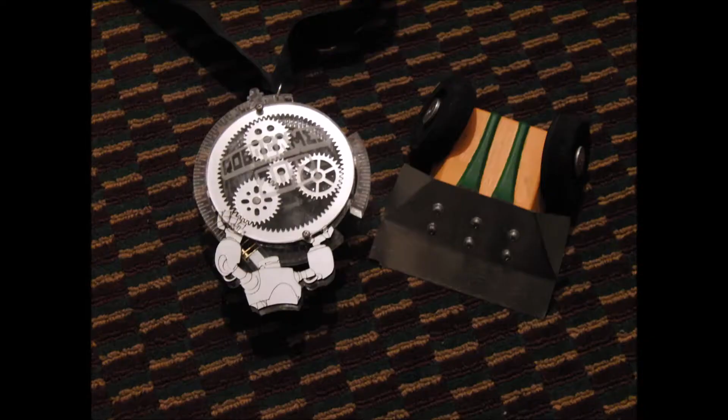This was the next version of Vendetta Junior, so I originally planned to have 4-wheel drive, to try to get some extra control, because that's what the guy who beat me at Robo Games had, so I was trying to copy him. But it was a bit of a disaster, and yeah, as you can see, I don't even look after it very well. This is kind of rubbish.

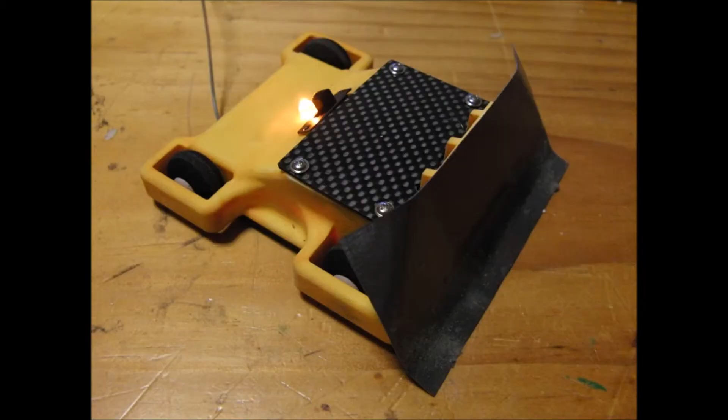And then at the start of the year, when the Ipswich Robotic Sports Club started up their antweight competitions, I decided to rebuild my little 2-wheel drive, 4-wheel drive pushy bot. And this is what I started with. So this is Big Yan. So this is the same robot, new name. So this one was laser cut using some scrap that I had at school.

It originally had 4-wheel drive, well it wasn't 4-wheel drive, it was actually tracks. That was the idea of it. So I had rubber band tracks. Rubber band tracks are an extremely bad idea, never use them. This robot is scrap.

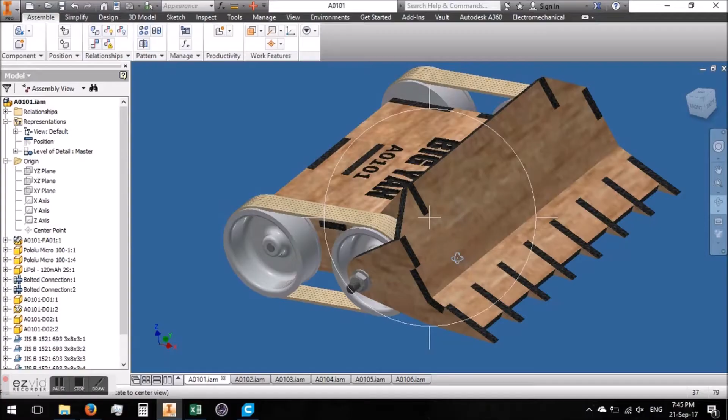Okay, then I went to revision 2, so this was revision 2 of Big Yan. Tried to move the wheels forward and make some extra room on the inside. Unfortunately I couldn't actually fit the speed controllers in, so I had to quickly knock up a new version 3. So this is version 3. Replaced the rubber bands with O-rings.

The problem was that the drive motors were connected to the front wheel, and the O-rings were actually pulling on the motor shaft and twisting it, which jammed up the whole drive, and the whole thing didn't work. So that robot was a disaster as well.

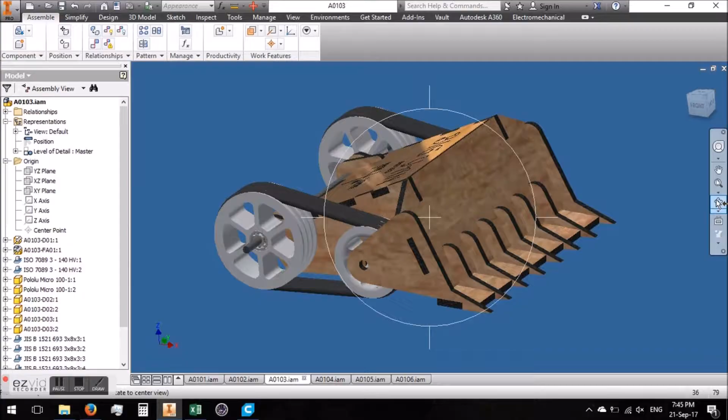Okay, so this is revision 4. It's exactly the same, only 3D printed, because I bought a 3D printer. Yay! Exactly the same, except the motors, which you can't really see because it's black, but the motors were no longer attached to the front wheels, and there was a gear running between the motor shaft and the rear wheel. That way the force of the O-rings was no longer twisting the motor shaft.

The problem with this version was the motors kept falling out and the whole thing didn't drive, so yet again another disaster that needed rebuilding because it did not move.

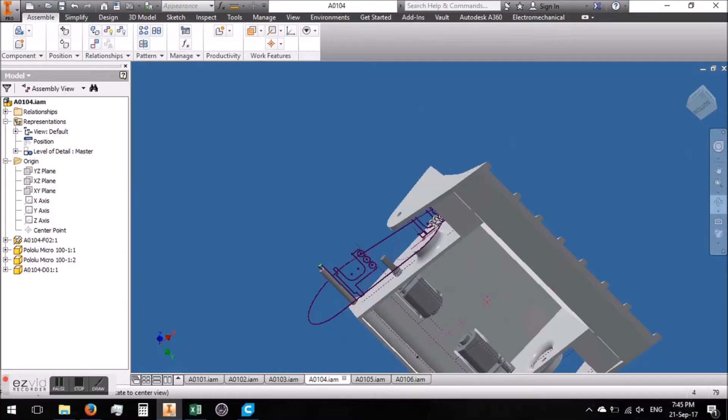Okay, so this is revision 5, exactly the same layout. The motors were still in the middle with gears attaching the motors to the rear drive, that way there was no force on the motor. And this time the motors are mounted into the chassis here, and then a top plate was bolted on to hold the motors in place, which worked extremely well.

It still had the problem with the force of the O-rings locking the wheels up, so I actually ran this with only one O-ring on the tracks, which wasn't really what I wanted. I wanted redundancy on the O-rings, and so this performed all right, but it needed improving, so then I went to revision 6.

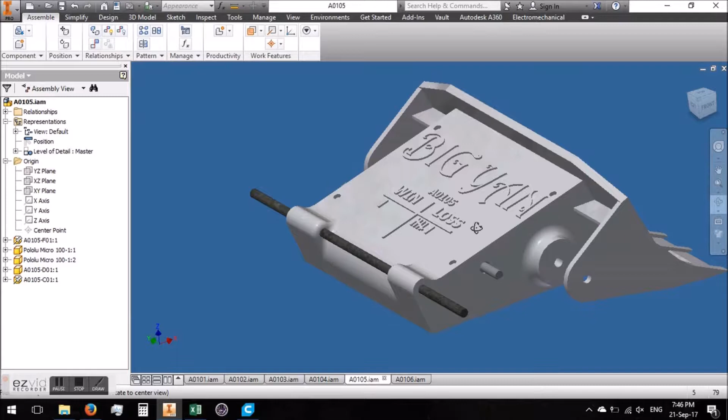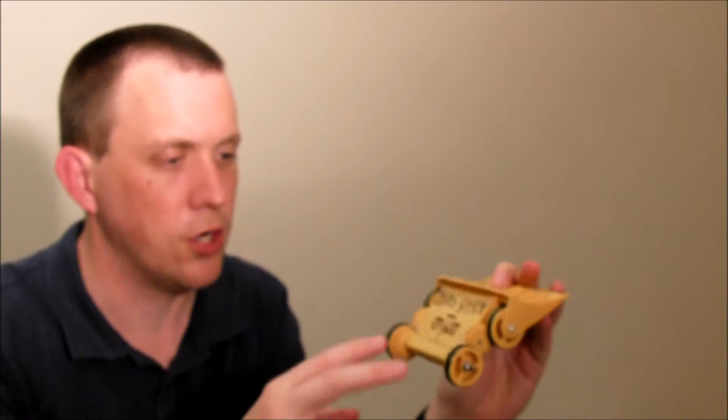And this is revision 6, so the motors are still in the same spot with the top plate holding them in place. The only difference is that instead of having the big wheel on the back and the small front wheel, with O-ring tracks running between, it's now just 4-wheel drive. Also sharpened the wedge a little bit. Other than that, it's exactly the same robot.

Now, the problem with this robot, as I found out on the testing days, is that when it's upside down, all the weight is resting on this section at the front, and there's not much weight on the wheels, so it doesn't drive very well. So what I want to do is use these little ball bearings that I use in the wheels and mount 2 to the front of the wedge at the top. That way it rolls around on those ball bearings and hopefully drives a little better.

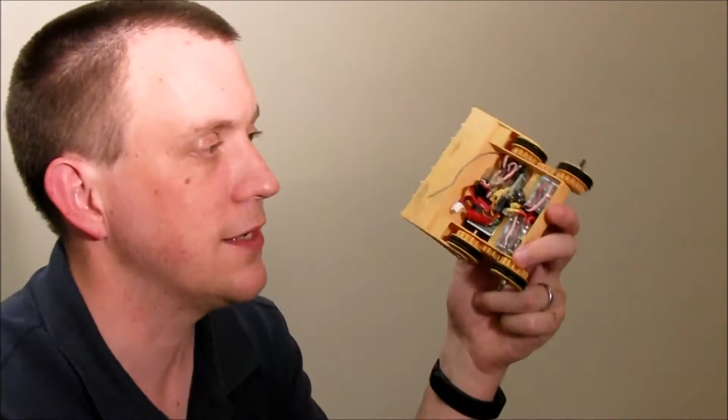The other change I want to make is I'm currently using these single channel speed controllers, which are alright, but the problem is I use this radio here, which is a 2-channel wheel radio, but it has no internal mixing on the radio, so I have to have a mixer here, which means I have all these extra wires, and I think half the weight is just in the electronics trying to get all that to work.

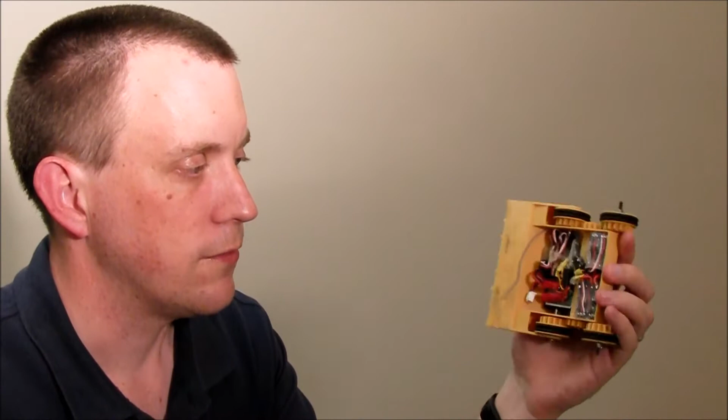So what I want to do is replace these single speed controllers with the dual channel speed controller that I'm currently using in Slightly Mad Angus. So this one has internal mixing. What that'll mean is I'll have one single speed controller this size to control both motors, so I won't need that speed controller, I won't need this mixer, and I won't need all this bundle of wires. So I'll be able to reduce the amount of wires in here, which will reduce the weight of the robot and reduce the weight sitting on the front.

I also want to put a base plate on here to try to cover all that up, because even though I've never had a robot hit on the underside, which is extremely surprising, I think one day it's going to happen. And if I have a base plate I need an on-off switch on the top to turn the bloody thing on and off. So the 4 changes I need to make are the casters on the front, replace the speed controllers, put a base plate on it, and put a switch on the top, and that would be revision 7.

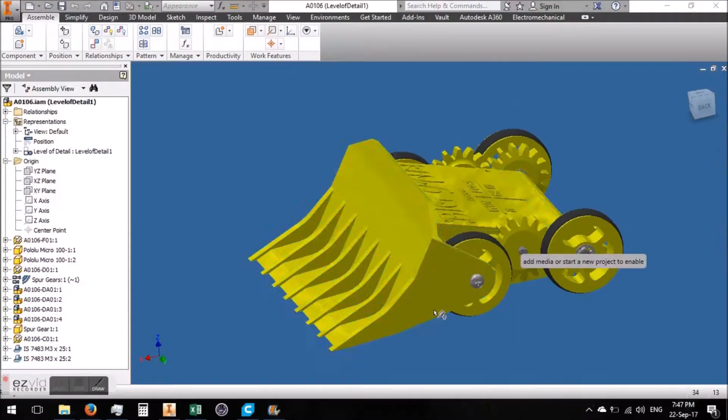First thing I need to do is update the Inventor model for Big Yan. So start off by putting in the location for the caster mounts, and then draw the little profiles for the caster mounts. So these are the caster mounts going on right now. I only need to do one sketch for this, and I pattern it across. So it's actually mirrored across twice. There we go. Looks good.

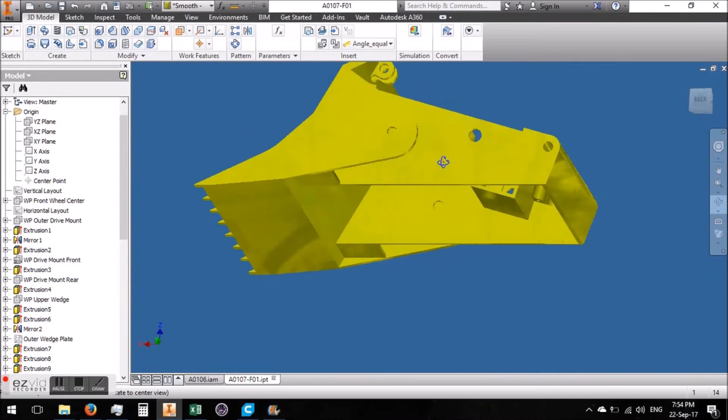Second step is to update all the text on the top. It had 5 extra wins and a loss since its last fight, so it's getting quite a lot on there. It actually takes me longer to update the text on the robot than it does to actually draw the rest of the parts. So there we go, text going on.

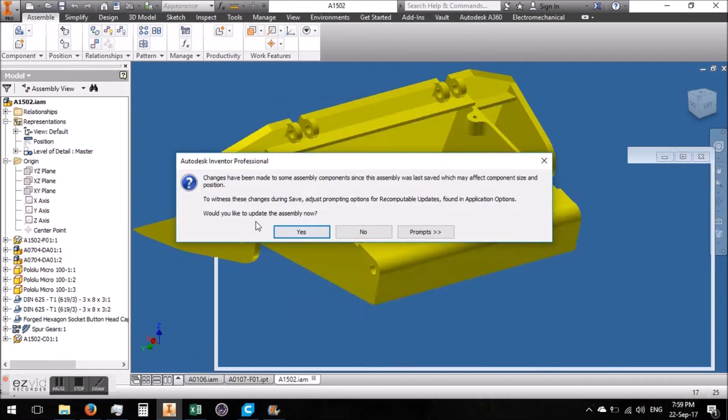I then open up the model for Slightly Mad Angus and take the dimensions for the switch, and then use the same size switch on Big Yan. So just copying the switch mount across. Yep, looks good. Now I've got to update the top panel so that it actually fits around the switch, because there isn't enough room there.

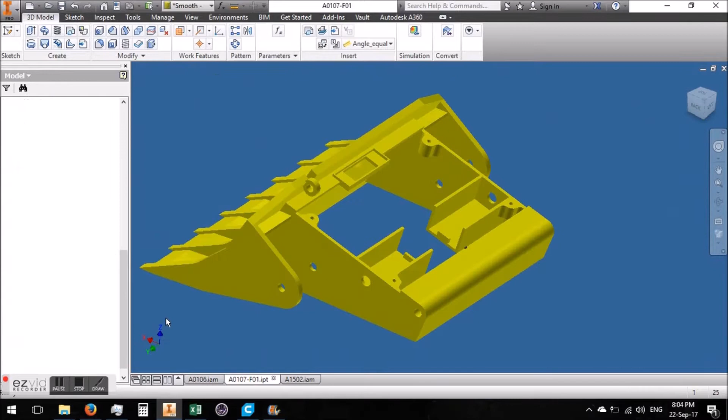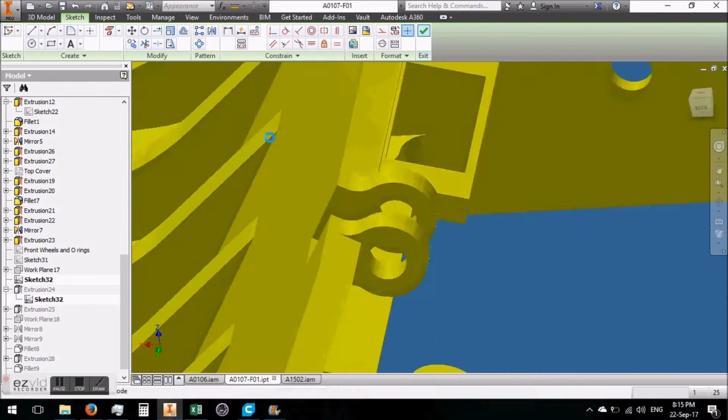Yep, looks good. Now I've got to do the bottom panel, so drawing in the mounts at the moment. So these are the mounts for the bottom panel. And then I add the dimensions and drawings for the panel itself, even though I don't actually extrude it in this model. I'll derive that across to a separate model later. There we go, just updating the casters a bit better.

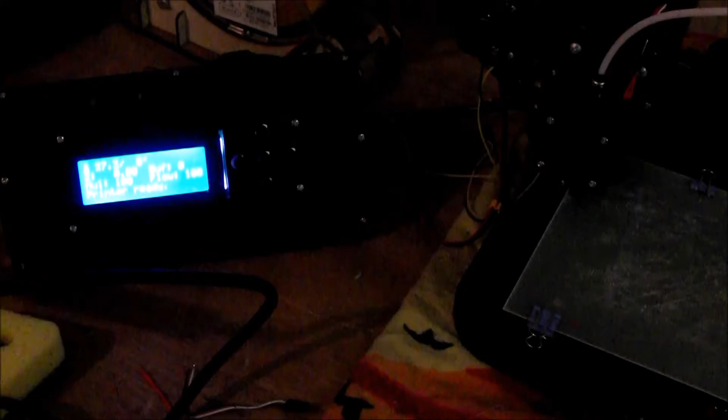Okay, now making the bottom panel by deriving the sketches across. So there's the bottom panel. Put that into the assembly, make sure it fits, all looks good. And then put that into Cura to 3D print. Here's my Tronxy, so I can print on that. Unfortunately, I only have one power point in the garage, so I can't plug in the lights and the printer at the same time, so these videos are a little bit dark.

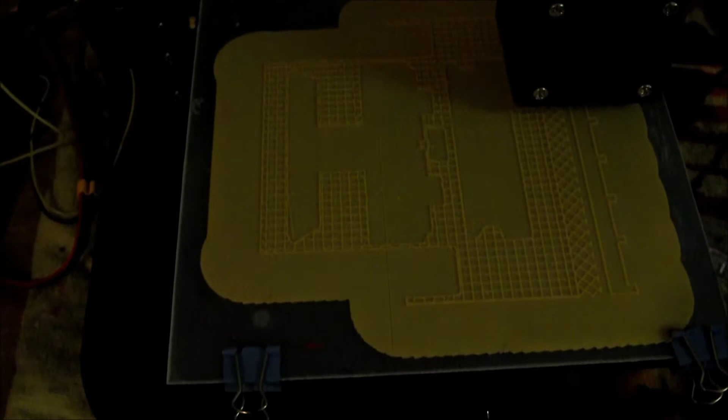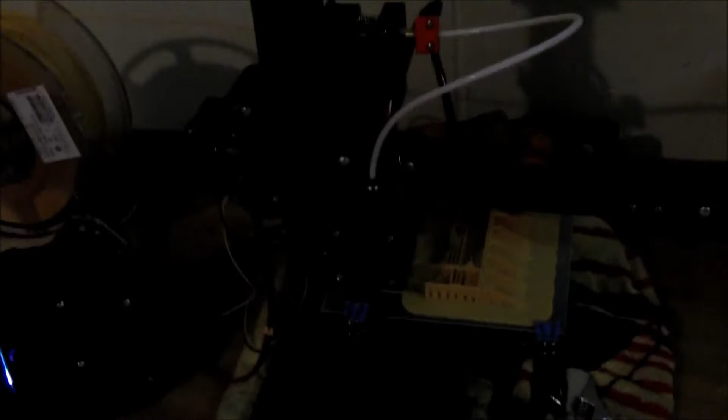There we go, lay down the raft. So much stringing on my models. All those strings. Okay, this print actually took 23 hours to print, so it's quite a long time. I'm a rather patient person when it comes to printing, so I don't mind if it takes more than 20 hours to print something.

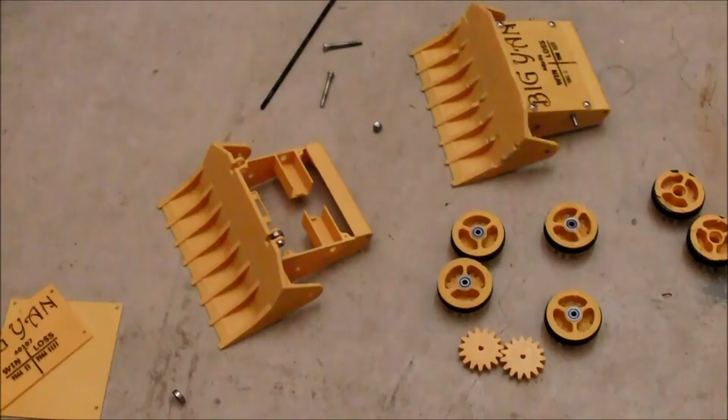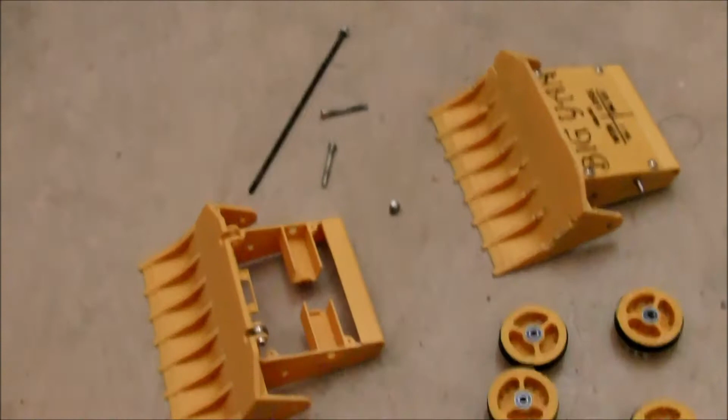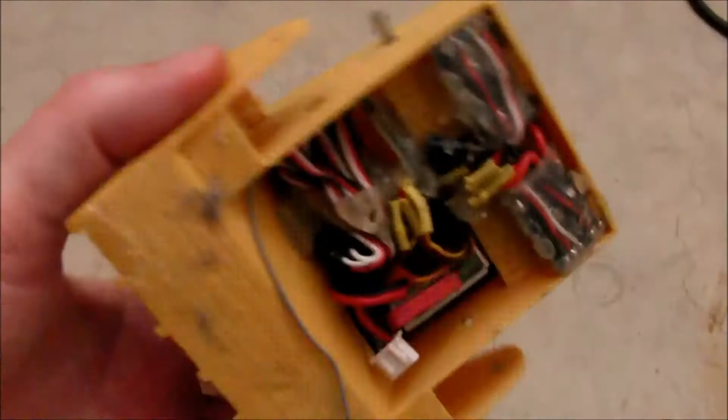Here is the finished 3D print for version 7. Cleaned up alright, so it looks alright. I've already tried putting in the first caster on the top. There's the top panels for it and the bottom panel. I've also printed a new set of rear wheels for it. There's the old version. So now I just need to strip apart the old version, pull the electronics out and put it into the new version.

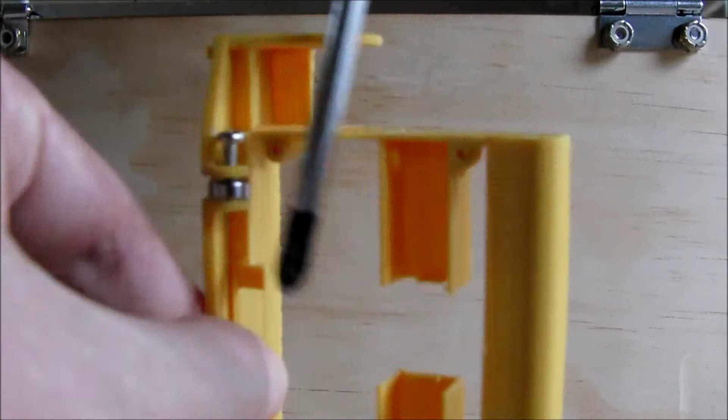Okay, the first step to do is to have the other caster on. Pretty easy, just a little screw running through. Okay, now pull apart the previous version of Big Yan.

That little mouse you can hear squealing in the background is actually Alice playing in her playpen. It's been sped up 4 times, she's a bit squeaky.

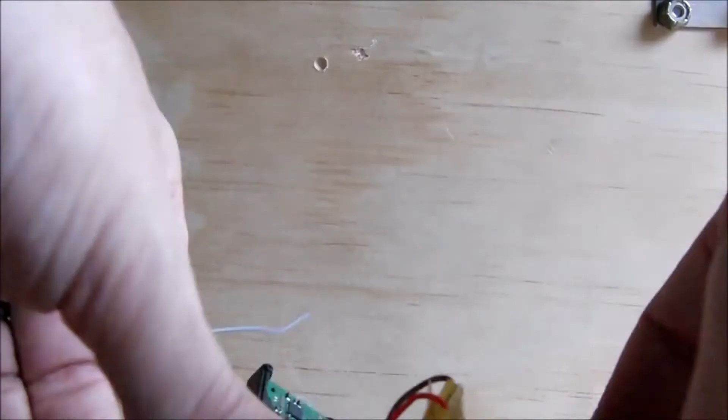Now I've just got to pull the motors out, and the speed controllers were held in with hot glue, so they're actually quite hard to pull out. I have to use a screwdriver to sort of pry them out. I love hot glue. Okay, you can see how big the previous electronics were. Just remove the motors from the previous lot of electronics. Keep them for the new robot. Check that they fit.

Now this is pulling the speed controller out of Slightly Mad Angus. They don't actually write on the speed controller which wires is which, so I'm just putting the servo leads back on straight away before I forget, because I use the different size servo leads for the different robots.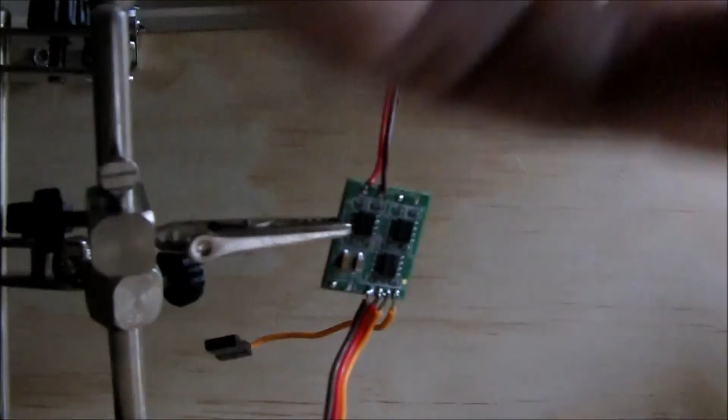Now take the power lines off, then disconnect the motors, then hold it in place with a clamp so that I can put the motor leads back on, because I didn't really want to unsolder the motor leads at the motors in Slightly Mad Angus, so I'm just using new motor leads on this version. There we go, my awesome soldering skills.

Now to solder the new power lines on. I'm soldering the on-off switch directly to the board just so I can save on using heat shrink. I should only use one piece of heat shrink. I think I actually soldered myself while doing this. I'm good at that. Put the single piece of heat shrink on, which is pretty cool. I hate heat shrink. Awesome.

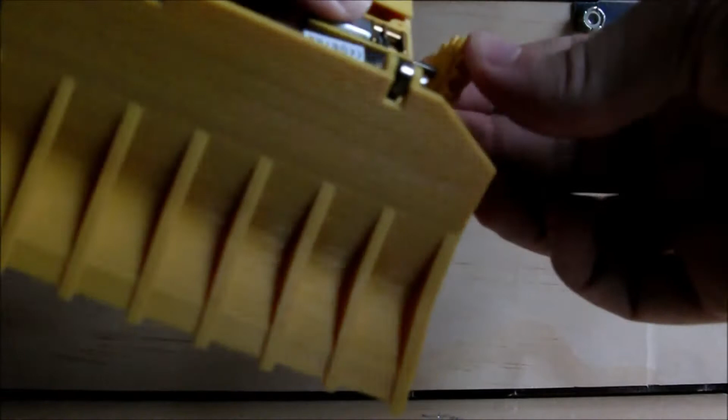Now I have everything installed in the new robot. I want to put the gears on and test to see whether or not the motors are turning the right direction. So I set it up and give it a bit of a test drive, even though there's no wheels on it. And it turns out one motor was actually wired in backwards, which I tend to do quite a lot. So quickly pull the motor out and reverse the wire polarity on it. Give it another test to see how that drives. Put it back in, put the gear back on so I can see what I'm doing, and everything's turning the right way. Awesome.

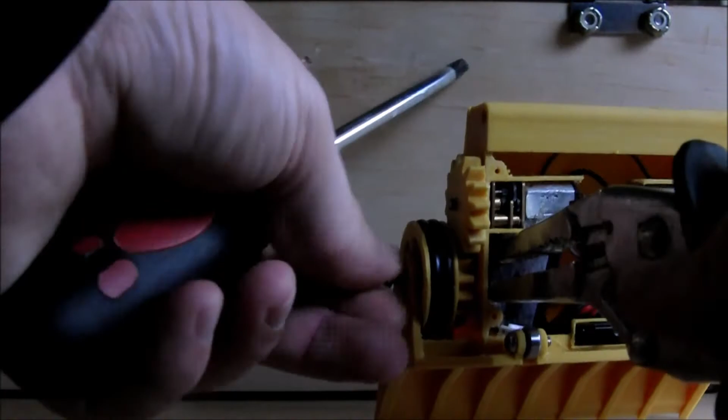Okay, now to put the front wheels on. Front wheel is held on with an M3 screw and a nut on the inside. It's just a bit hard to get the nut on while the electronics are on the inside, but yeah, we managed to get it on. The other wheel goes on a little bit easier.

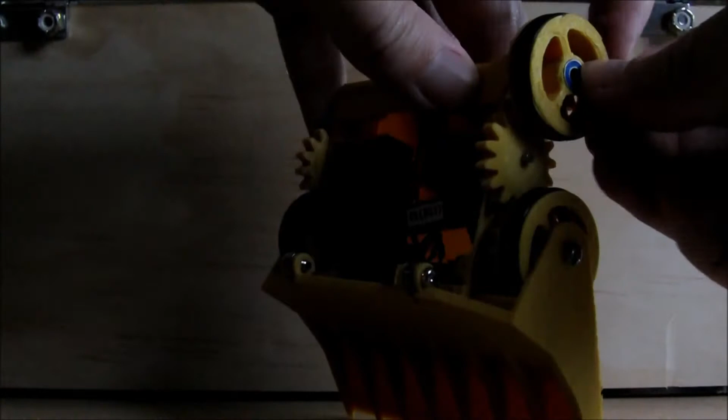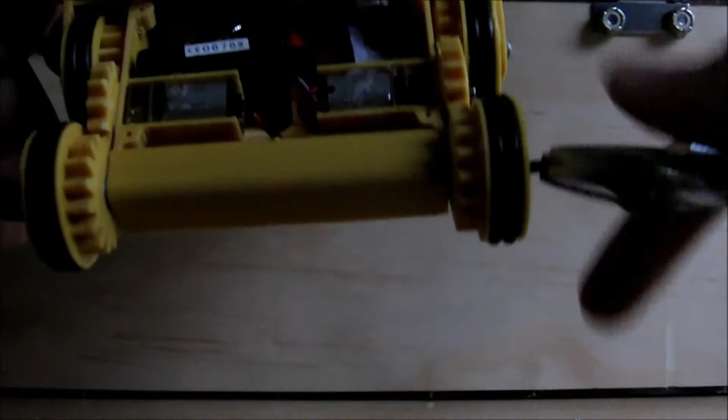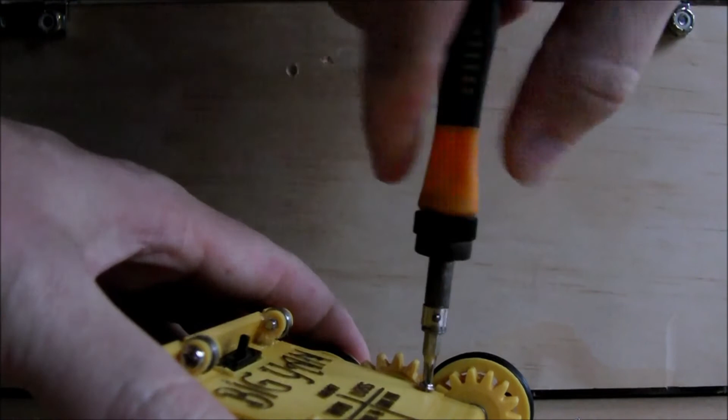Cool. The back wheels are held on, there we go, with an M3 threaded rod that runs all the way through, with a nut on each end. So just grab hold of the nut on each end to give it a few twists. There we go. Main problem with this is that the threaded rod's too long and I really need to cut it short. Now just put the top plate on and we're finished. So on goes the top plate, and Big Yak version 7 is ready to fight.

Cool. Just checked on the scales, this robot weighs 134 grams, so it's actually lighter even though it has a base plate and casters on it. So those new speed controllers are cool.